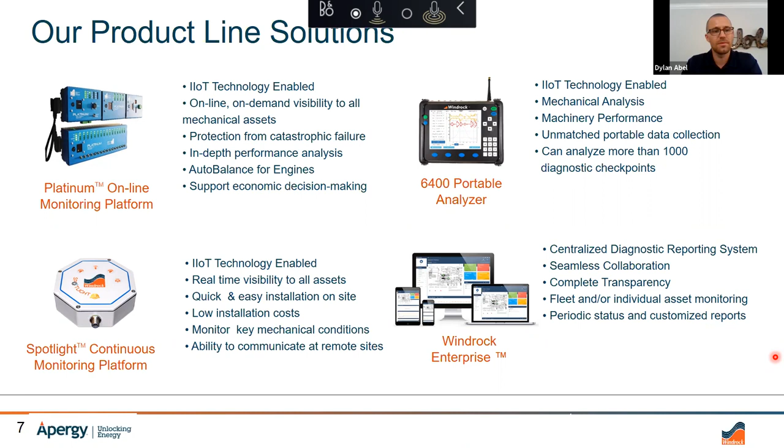Go to the next one there, Mike.

So where our systems are used: we kind of worked with our customers, got an outlook of the market on how we divide up our products with respect to the machines. So there's about 20% of the machines out there that are your critical assets. These are crucial to the process. They require a shutdown at the sign of an issue, because you don't want to have a catastrophic failure. And this is where Platinum comes into play with the real-time data updating almost every second. It's got built-in relays, so you can send a signal to, say, your PLC to shut down the machine before there's a catastrophic failure.

And you've got 75% of the assets out there that are essential. So this is where you install Spotlight across your fleet. It'll raise its hand and let you know where you need to go out with the portable analyzer to take data that day.

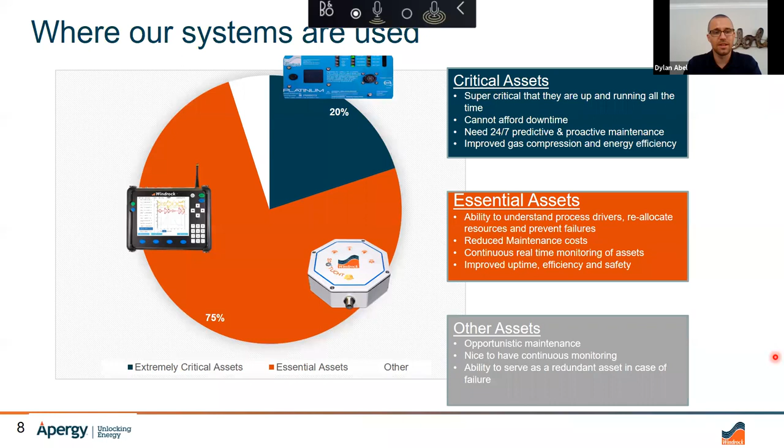Okay, guys. This presentation is going to be in 2 parts. I'm going to talk about the rod load, and Mike will talk about the actual pin load. So if we look at this cutaway view of a compressor, you notice that the piston's in the cylinder to the right there, and the rod is attached to it. So the gas forces inside the cylinder will act on the rod, and then the forces will also go through the rod into the crosshead, and start acting on the pin and bushing there. So the software actually measures 2 points here: the rod load and the pin load. Mike's going to talk about the compressor pin part later. I'll talk about just basically the rod loading right now.

So you can ask yourself a question: what's the weakest link in the crosshead? If we go back to that last slide real quick, Mike, if you look at all these components in this compressor here, what is the weakest link? If operations puts too much gas pressure in the cylinder, will the piston break, or will the rod break? Or if it overloads that cylinder, will it wear out the bushing in the crosshead? Or will it break at the actual threads where we screw it into the crosshead? So every manufacturer has a different location for its weakest link. And it's really important that you know your equipment, so you can set up the software accurately and tell what's your rod load. We're gonna talk a little bit more about that later.

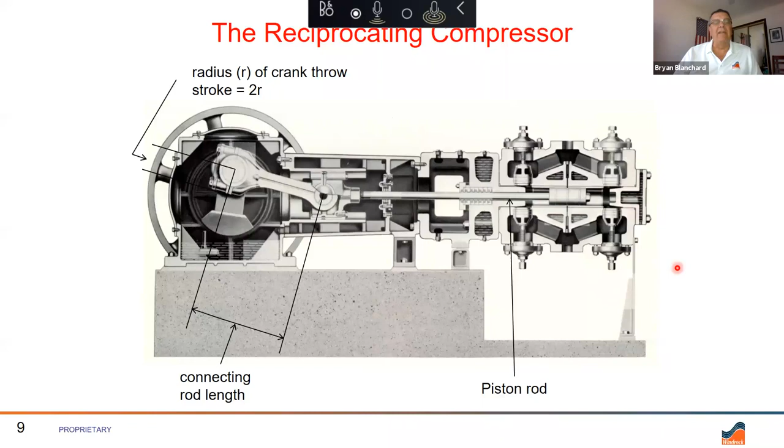The next slide here shows us just a basic pin, a piston and rod. So that's what I'm gonna talk about here. This is called rod load. Basically it's the gas force on each side of the piston face. So when the piston's moving forward, the pressure on the head end is greater than the crank end, so it's actually bending the rod. And then when the piston's moving from top dead center to bottom dead center, the pressure is greater on the crank end part of the piston face, so the rod is actually stretching. So within one revolution, the rod bends and stretches. So this is rod load. It's kind of like a coat hanger effect. It can bend and stretch for a long time, just like a coat hanger.

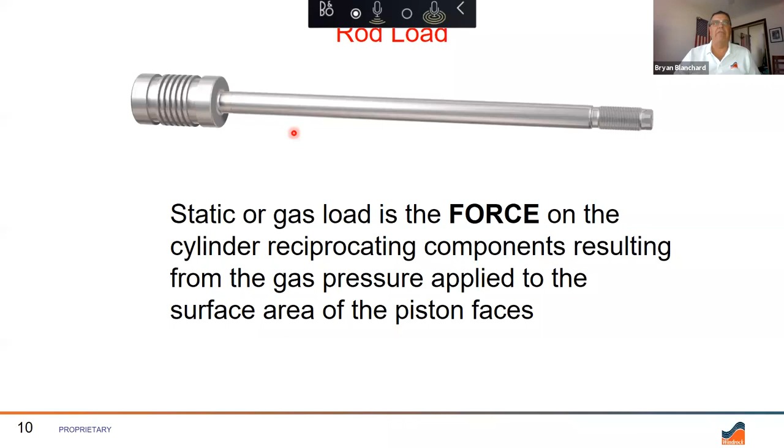You can bend a coat hanger and you'll never break it. But if you bend it too much, it'll actually snap, right? So manufacturers know how much this rod can bend and stretch, and they give us a limit. So the software will calculate the rod load, the actual rod load, and compare it to the limit of the manufacturer. Okay, so the next slide shows pretty much the formula for gas force.

And it's a real simple formula. You can do this on a calculator, actually. So the gas force on a crank end is actually equal to the pressure on the crank end times the area of the crank end. And that's it. So if you look at the formula at the top, gas force CE, so the top there,

Mike, for me? There you go.

So to figure out the force on the crank end, all we have to do is take the crank end pressure, PCE, times the area of the crank end. So the pressure is real easy to get, and if we know the bore and the rod diameter, we can calculate the area very easily also with these formulas right here. So that's the force on the crank end. And then the bottom one here is gas force head end.

So once we calculate the force on the crank end, then we have to calculate the force on the head end. So the software is going to do two formulas here. It's going to do the gas force on the crank end, then it's going to calculate the gas force on the head end. Once it does these two, it has to subtract the two, and that's your actual rod load. And that's gas force only. This has nothing to do with the weights or the inertial forces. Okay, we'll go to the next slide.

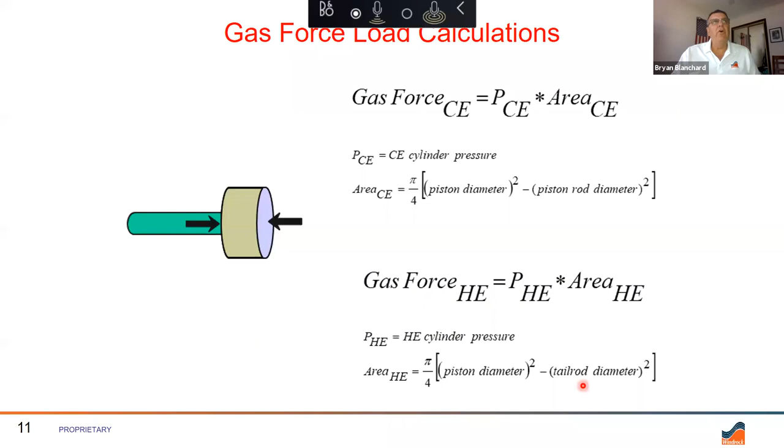Here we're talking about the compression calculation. So to figure out compression calculation, we're going to take the head end pressure, okay, and we're going to actually take the area of the head times the discharge pressure. So when the piston's moving from bottom to top dead center, the pressure is greater on the head end. So that's why we're going to use the head end discharge pressure. And then you're bending the rod. You can see the rod here is kind of bending on us, right?

But we do have a little help from the crank end, right? So we have to get the force on the crank end. So that's when we're going to take the suction pressure times the area of the crank end. So once we figure out the force on the head end of the piston and on the crank end of the piston, we're going to subtract the two, and that's going to be our compression calculation. And this is going to be expressed in pounds force, because basically it is force, right? And the higher the pressure, the more force we have. So that's the calculation for compression.

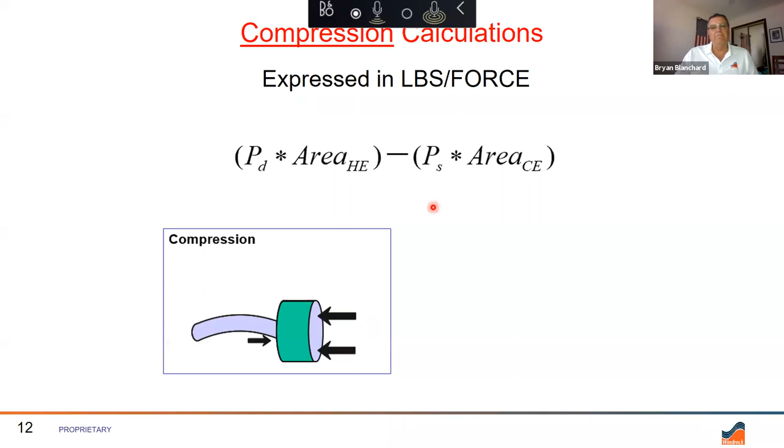Next slide shows us the calculation for tension. So tension calculation, like I said, this is when the piston's moving from top dead center to bottom dead center. So now when the crosshead is pulling the rod back, we have more force on the crank end, and we have a little bit of force on the head because the crank end now is in compression and discharging. We have more force on the crank end, and it's actually stretching the rod. So you can see here that the rod is being stretched in the picture.

So the calculation for tension is basically the same thing, but now we're going to take the suction pressure on the head end times the area of the head end, and then we're going to take the discharge pressure on the crank end times the area of the crank end. And we're going to subtract the two, and that's going to be our tension calculation. And this is also expressed in pounds force. And it's that simple. So this has nothing to do with weights. This is all the pressure inside the cylinder on each side of the piston face.

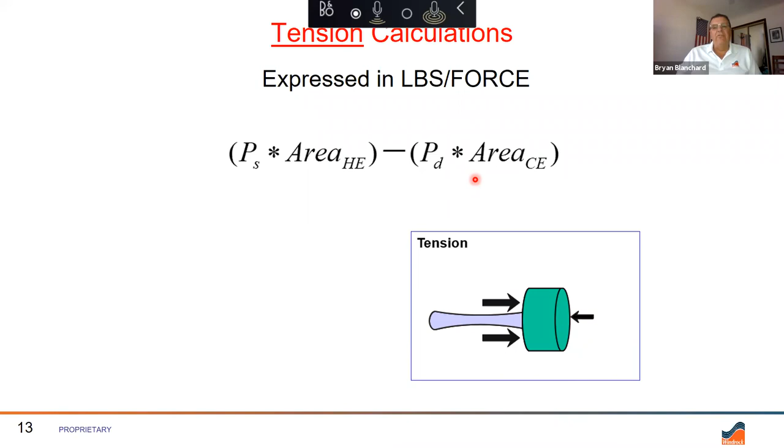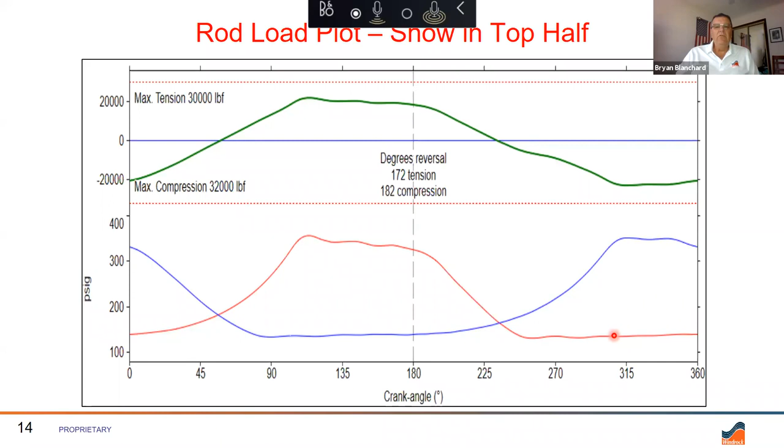So if we go to the next slide here, if you don't like to look at it that way, you can look at that gas force in the middle of the plot, right? So all we have to do is right-click on the plot, go to options, and right here to the right, you're gonna see rod load plots, and we'll grab overlay on main.

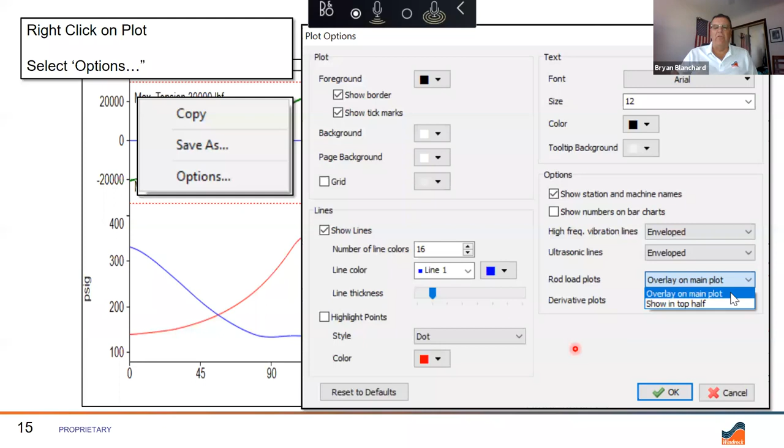So if you do that, if you go to options and grab overlay on main, we'll go to the next slide. We can see now that the gas load here is overlaid on top of our head end and crank end. So some people like to look at it this way. It's a little easier to look at, and we can compare the data.

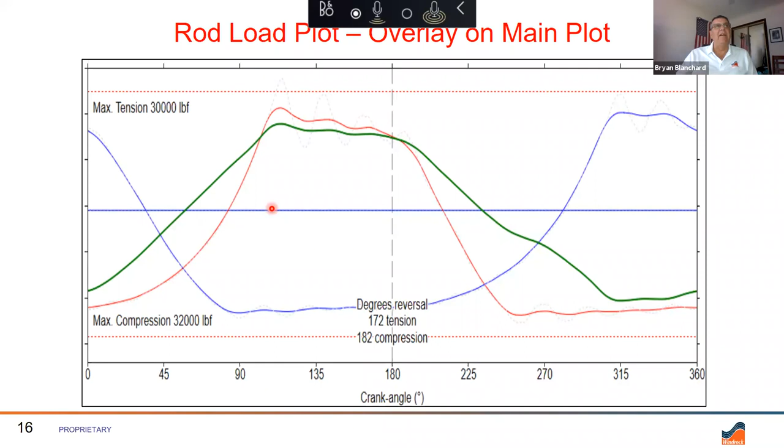Okay, so basically what the software does here, it calculates the gas force at every crank angle degree. So if you remember those formulas we were just looking at, the next slide here is a zoomed-in view of what the software is actually looking at. So the software looks at it per dot. We look at it in a line trace.

So if you go to degree number 1, right, degree number 1 shows us the suction pressure, and that's your gas rod load right after degree number 1. So if you look at your gas pressure for the crank end here, it's at suction, it's around what, 140. Okay, so that's our suction pressure on one side, the piston face. And if you go to the head end discharge at degree number 1, yep, it's about 315.

So the software is going to use the 315 and the 140 for the pressures, and it's going to calculate the rod load. And then it's going to come up with a rod load at degree number 1, Mike. The rod load here at degree number 1 is about 45,000 pounds. So if you look all the way to the left, you're going to see your rod load plot there. So it's somewhere between 25 and 50, probably around 40, 45,000 pounds force.

And then as the piston moves another degree, now the software is going to sample the pressure data at degree number 2. And now it's going to use the pressure data at degree number 2 to calculate the rod load, the gas force there. And it's going to do the same thing for degree number 3. So the software is actually going to calculate 360 rod load points for us in one revolution.

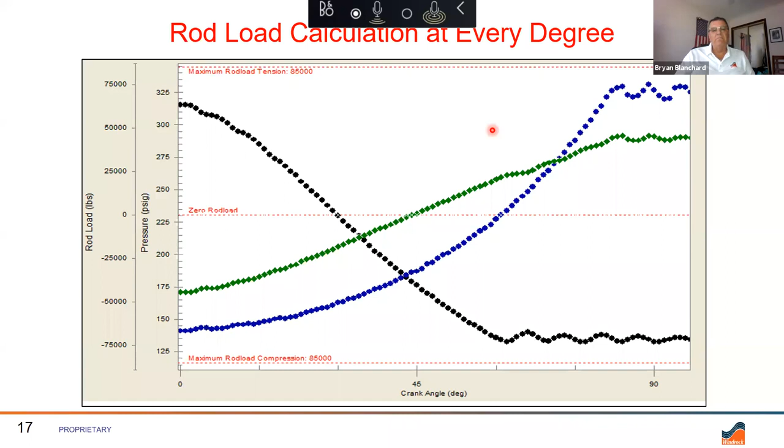So our next plot here is the actual software looking at the plot for us. And you notice cylinder number 1 here, the absolute load in pounds force is 20,413. So the compression on this particular cylinder is 20,413. And then if you look at the tension, it's 18,313. And the next column is telling us percent load.

So it's telling us that that rod is at 63.8% in compression. It's going to divide the actual 20,000 by the 32,000 where Mike's pointing right now. So this software calculated 20,400, divided it by the 32,000, and said that that rod load is only 63% load.

So the objective here is we have to make sure that in the software, we have the correct manufacturer's limits here. So in this particular unit, we did go to the manufacturer. They did tell us it was 32 for compression and 30,000 for tension. So sometimes this is a hard number to find. Sometimes it's on the actual tag of the compressor. Sometimes you have to look in the book. Sometimes you have to make a phone call. But we need to get this information correct.

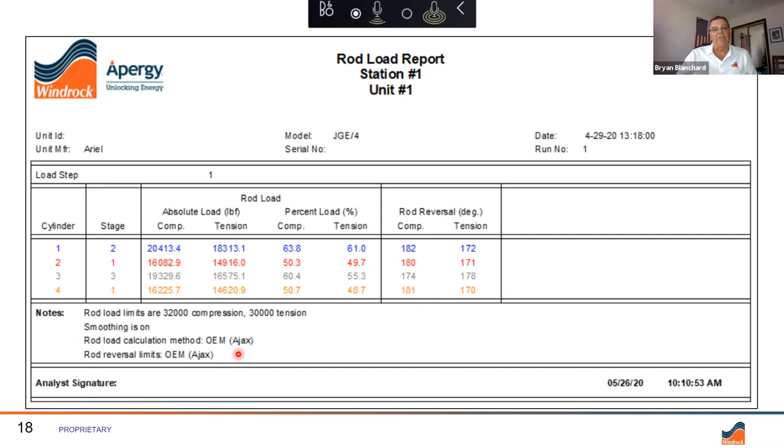And if you notice down here in the notes also, this is from an Ajax compressor, okay? So Ajax rates their rods a certain way. And Dresser rates their rods differently, and Ariel rates their rods differently. So everybody has a different way of rating their rod. So some guys, they rate the rod itself. Some guys say that the weakest link in the throw is the bushing. So you have to make sure that you know your equipment and you check the right manufacturer and you get the right rod load limits.

Okay, so the software helps us here. So if you go to setup software options, and then in the software options window, you go down here to the rod load and reversal. And you're going to see here at the top, what we're talking about here is rod load calculation method. So later on, Mike's going to talk about the actual pin load. Here, we're just talking about rod load. Remember, there's two different components here we're going to look at. The software is going to look at the rod load and then the pin load.

So at the top portion of this window here, rod load calculation method, I'm checking OEM. And then I'm going to hit my drop down window there, and I'm going to grab the manufacturer of my compressor, whether it be Ajax, Ariel. So there's a list here that we can look at. And then when you check Ajax here, you notice that the rod load calculations detail tells us Ajax uses the suction and discharge toe pressures to calculate their gas force on their rod. Says that it does not use the inertial forces.

So in the software here, there's 20,413 down here on our rod load report. Cylinder number 1, stage number 2 is 20,413. That's because the software is going to look at the suction and discharge toe pressures, and it's not going to use the weights. It's just using the toe pressures to calculate that 20,413. And the same thing with the tension, the 18,313, it's using the toe pressures.

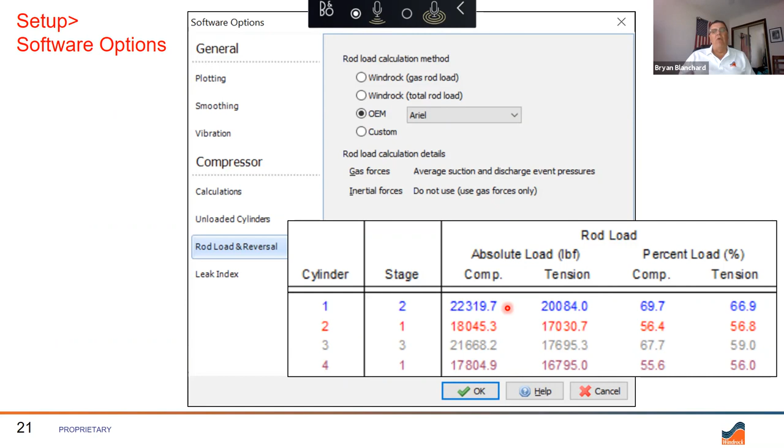The next slide here is just an example of a deactivated head end. If you notice, the blue trace here is a flat line, that's our head end pressure and it's deactivated. So we have a suction valve deactivated and it's just staying at suction pressure. But we do have a crank end pressure and it is compressing on the crank end. And we do get a rod load. So we want to make sure that this rod load goes into compression and tension. And Mike's going to talk a little bit more about that.

But what I'm trying to point out here is I've seen some analysts say, well, my head end's deactivated, it's not pumping gas, I'm not going to take pressure on it. But no matter what, you want to take pressure on the head end and crank end always. This way the software can calculate rod load and pin load for you. So whether it's deactivated or loaded, you always want to take pressures on both ends of your cylinder. So that's a little bit about rod loading. I think Mike's going to take over here and talk about the pin load.

Hey, Bryan, you want to answer these couple of questions real quick that came in while you were speaking? Yeah, sure. So the first one is from Ralph. When it calculates the rod load, does it use absolutes or does it matter? It uses absolute, yeah.

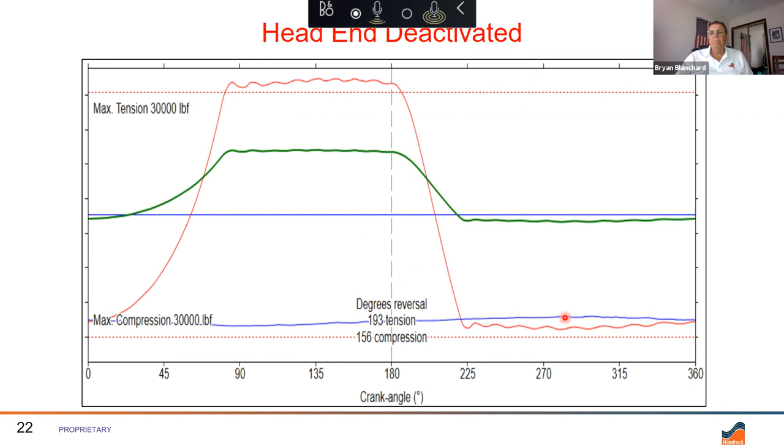The next one here from looks like Javad Esmil. If the OEM doesn't specify the rod load, how do you specify it? Yeah, that's a hard one. I mean, we do have our Windrock geometry table. You can look up your compressor in there. And if you want to trust that data, what I do is I try to find, like I said, Ingersoll Rand HHE compressor in our Windrock geometry table. You might have about 10 to 15 different HHE compressors. And if you see your rod diameter in there, I'll look at several different ones and I'll try to maybe get an average of those.

Mike, you got any other way of trying to figure out rod load if you don't have it? Yeah, at least Ariel makes it easy on us. If you've got your sizing program, they give you all that information. And it's on the tag too. Yeah, you can find that on the tag for Ariel. Some of the Dresser and Worthington, some of those others, especially the older ones, are real hard to find that information. And another thing, you have to make sure that you're getting the information for the rods you've got in there. We have some aftermarket rods and we have the OEM rods, and their tension might be different. That's a good point. The material is different. That's right.

But yeah, the best way to do it is, I believe we have that on our website. And I think it's also in the help section of the MD software. And it's called the Windrock Geometry Program. And if you can find some of your equipment in there, you can match it up. Yes.

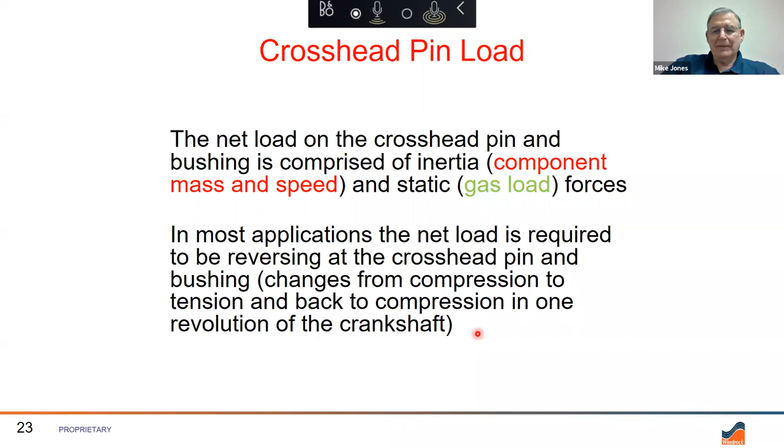And this is kind of another one of those plots where we can actually see the inertia load here. Now this is the pounds of force that's being generated by the instantaneous acceleration of the masses of the crosshead, which is all the weights that we have entered into the software. And this works exactly the same way as what Brian was talking about. We're taking this instantaneous acceleration per degree and calculating it at 1 degree increments. Okay, then we have the gas load down here, which Brian talked about, and it's showing its normal track.

Okay, now the red marker, that is red, isn't it, Brian? The total is red. I'm colorblind. Yeah, that's the total there, Mr. Mike.

Anyway, so we can see the total here is kind of an algebraic sum difference between these two here. In the slower speed units, the inertia load dampens the gas load, and in the high speed units it's just the opposite. The gas load actually dampens the inertia load. So when we're getting up to 1200, 1400 RPM, this inertia load can go quite high.

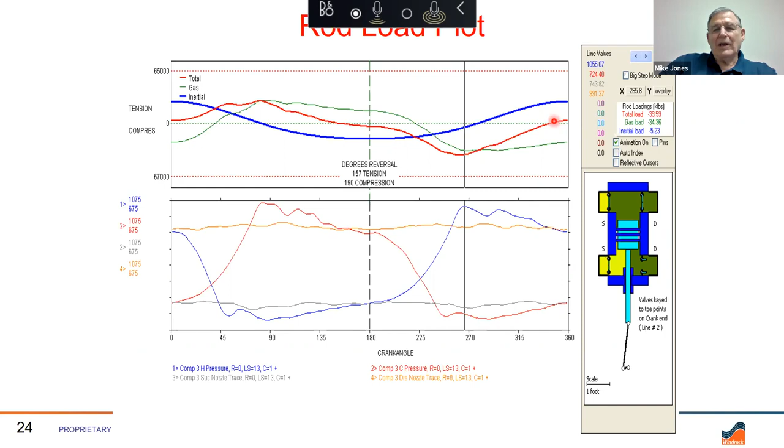Okay, and what we're talking about is the inertia load is the force in the cylinder that results from the change in velocity. As the piston takes off, we create quite a bit of inertia because we have quite a bit of acceleration going on then. Then when the piston starts to slow down, we have just the opposite effect. We have deceleration, which also creates a force in there. And another thing to remember, if we had both cylinder ends unloaded, the inertia forces are always reversing on every revolution of the crankshaft. So they're always going to go positive and negative, no matter what.

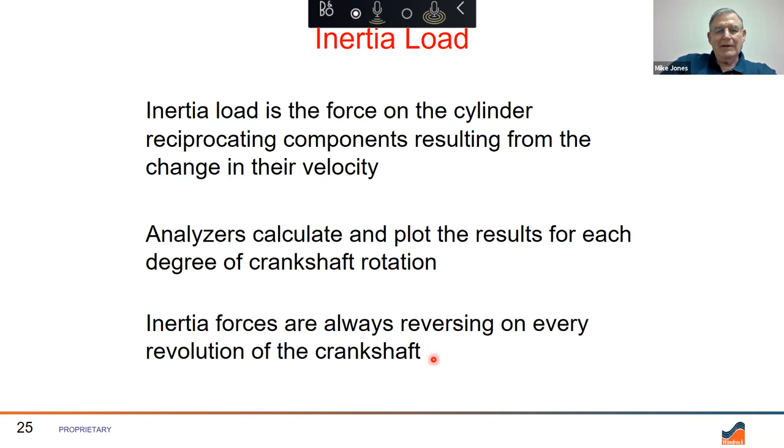And then the reciprocating inertia forces are caused by these masses here. Okay, so we have the piston mass, we have the rod mass, we have the crosshead mass that also includes jam nut, balance weights, whatever we happen to have attached to that crosshead assembly.

Okay, now we have a connecting rod here, but we don't include that in any of our inertia calculations because it's a pretty complicated thing, which part of it is rotational, which part of it is reciprocating, and it's different for every manufacturer. No manufacturer includes the connecting rod weight in any of their inertia calculations. Okay, so as these go back and forth, that inertia from that actual weight slings back and forth, and it causes a force on the same components that you're causing force on with the gas load.

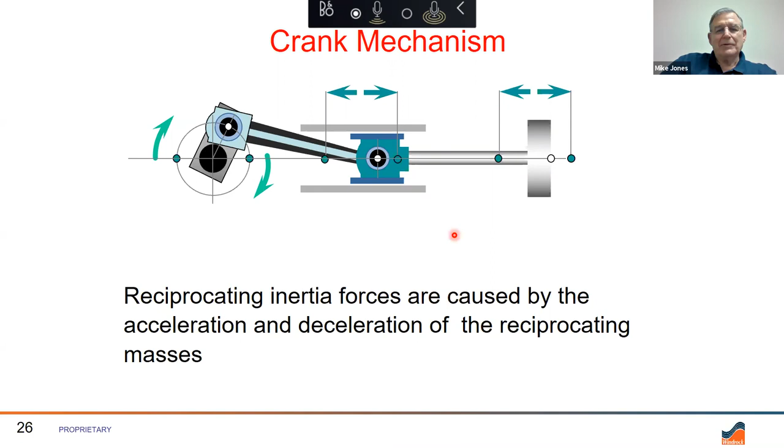Okay, here's a little chart where we can actually see the displacement of the piston as it goes from top dead center to bottom dead center, back to top dead center. And we can see it kind of flattens out a little bit on both ends and also in the middle. That's because we have several degrees of crankshaft rotation at both top dead center and bottom dead center where we don't have any piston motion at all. So that slows it down right in that area.

Okay, now the velocity here, we can see the piston as we start out at top dead center, we're going to be increasing in speed because of the ratio between the connecting rod and the crankshaft webbing. So we're going to speed up to where, just before 90 degrees, we have maximum piston velocity. As we go all the way back down to bottom dead center, then we have no velocity at all at 0 and 180. Then as we start going the other direction, just past 270 degrees, we have another point of maximum piston velocity. When we hit our highest piston velocity though, we really don't have any inertia going on there at all.

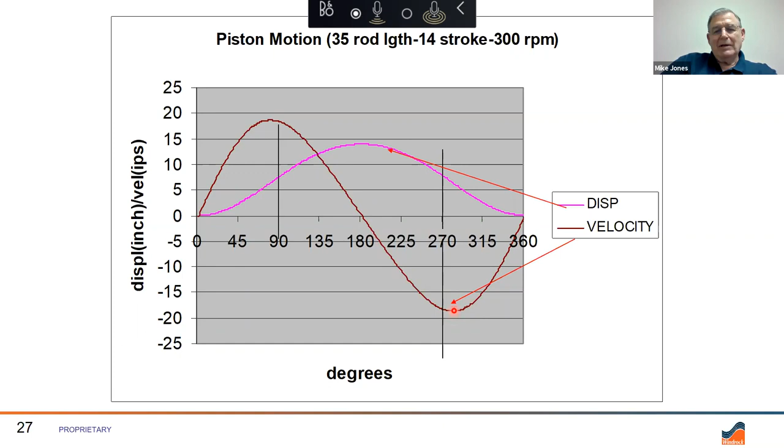Okay, and we see here that same thing where we have our tension load and our compression load by inertia. And it shows here with no gas load on it at all, we have 157 degrees of reversal in tension. We have 197 degrees of reversal in compression.

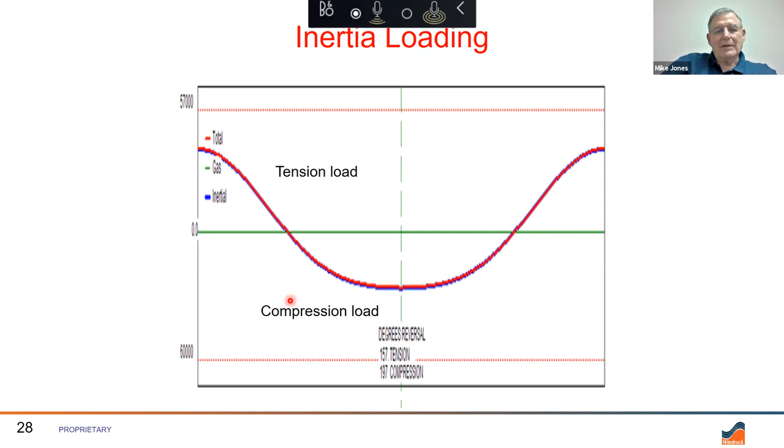So it's always reversing. Okay, your net load, or your total load, is just simply the sum of the inertia and the gas forces. It's calculated for each degree of crankshaft rotation, and the reversal occurs after the net rod load passes through 0 pounds and has met the manufacturer's requirements for reversal.

And just like rod load, like Brian was talking about, most manufacturers have specific criteria of how many pounds of force you have to have above 0, how many degrees of force you have to have above or below 0 to actually qualify as a reversal. So that's another thing that you need to find out from your manufacturer.

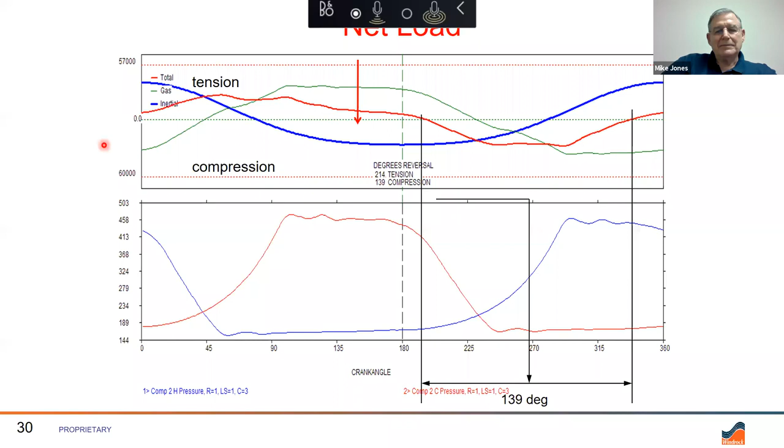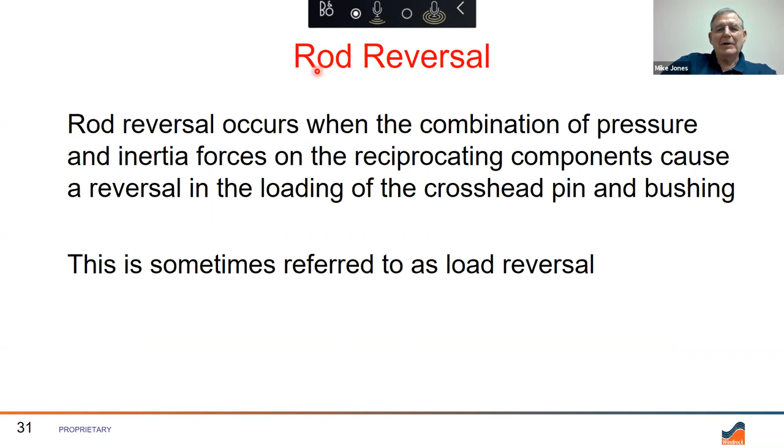Okay, your rod reversal occurs when the combined pressure and inertia forces actually reverse that pin and bushing, and it's also called load reversal. Now we hear that called rod reversal. Say we got rod load, we got rod reversal. Well, that's just kind of a generic term that we've got going on for that, but actually what we're looking at is the pin reversal. That's what we're wanting to go with.

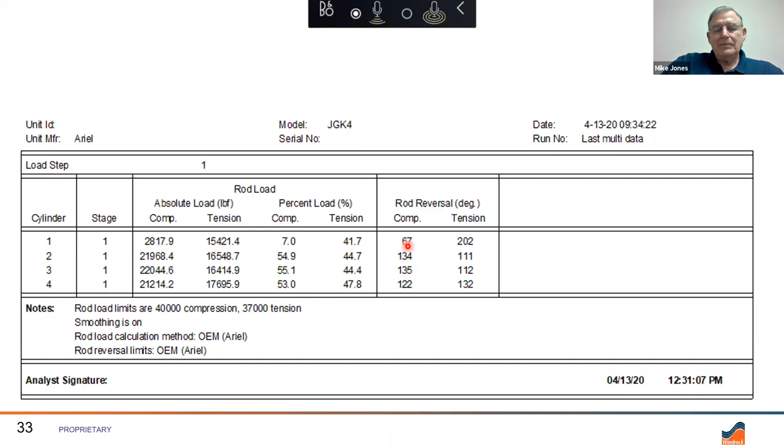As we can see by this report here, we're showing our reversals. This is showing the rod reversal in degrees in compression and tension. Like cylinder number 1, we have 67 degrees of compression. We have 202 degrees of reversal in tension. And then it shows that the rod load limits are 40,000 pounds compression, 37,000 tension. And the rod load calculation method is OEM Ariel.

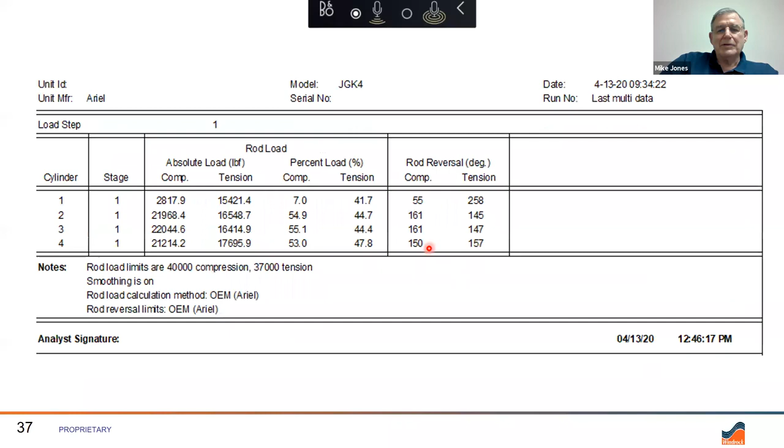So as Brian was telling us, we need to know what the manufacturer recommends for your equipment. That's some data that you're going to have to look up or try to locate somewhere. And like I said, if you're running Ariels, their sizing software has all that information in it for you. And some of the other ones, it might be a little difficult getting that information.

But if you've got the old books on it, I've spent hours delving through the libraries at different locations to find the actual paperwork and the books that they got with the particular piece of equipment when it was set. Some of it's 40, 50 years old, but that data was still there. So I had to dig through their libraries and find that information in order to set it up in the software correctly.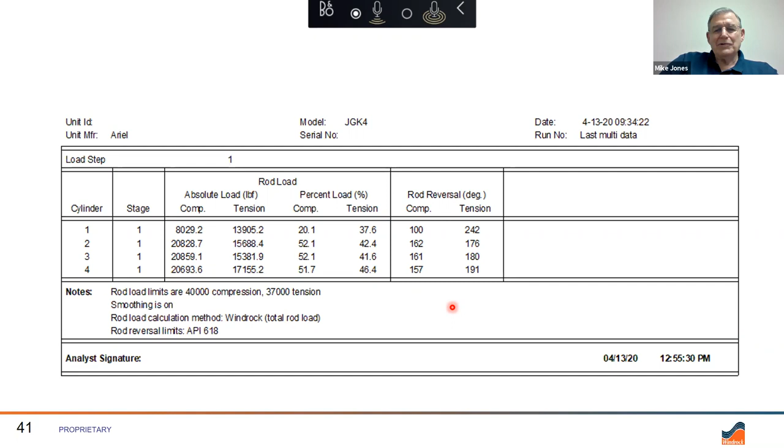Yeah, there are a few other questions here. I think Bryan's been answering some in the background.

Oh, thanks, Bryan. Yeah, I was wanting to know, Mike, when you're trying to figure out inertia load, should you use the nut, the piston rod nut? Should you use the balancing weight? Should you use the pin, your crosshead pin? What components in the throw should you use to try to figure your inertia? Yes, all of the above, everything except for the connecting rod.

Okay, then they have certain criteria and rules on that pin too. Some of the old Worthington compressors had what they call a captured pin, where the end of your connecting rod had a clamp bolt on it that clamped down on the pin and would not allow it to move inside the connecting rod, and then the bushings were in the crosshead.

Then we have some where the only bushing is in the connecting rod, and the pin is actually captured in the crosshead assembly, so it's nailed down in there. And then you have some where it's free floating, like the Ariel, where it has bushings in both the crosshead assembly and the connecting rod.

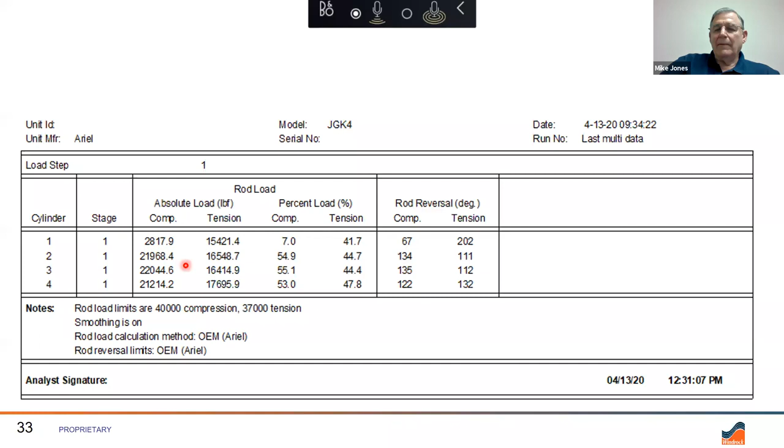Okay, here's one that says: I understand that gas forces affect rod load, but do I need the weights to calculate pin bushing load? Yeah, actually you do. You need those weights in there to calculate your pin load. And like I said, sometimes those weights are very hard to find.

So if you don't have your weights in there and you get a rod load with reversal on your calculations, if your rod load goes a little bit above or below your compression and tension limits, then you have to kind of figure in your head, well, the inertia weight's going to subtract a little bit from that, and it's probably going to alter the reversals as well. But if you don't have the weights, you just have to get along without them. We've been doing that for years when we couldn't get them.

Yeah, if I don't have weights and I'm pretty close to reversal, I'll try to throw some weights in there. I'll make some up that I think might be pretty close, just to see how it affects it. Sometimes it helps it, sometimes it hurts it. Yeah, I've gone back through all my databases and found compressors that were similar to try to calculate the weights.

Ariels, total weight, crosshead and everything, you're looking at 230 pounds up to 300 pounds, something like that. But some of those old big HHEs, you may be looking at 1,500 pounds of slinging mass. So you can probably guess pretty close within a couple hundred pounds on one of those big ones, which will help you out.

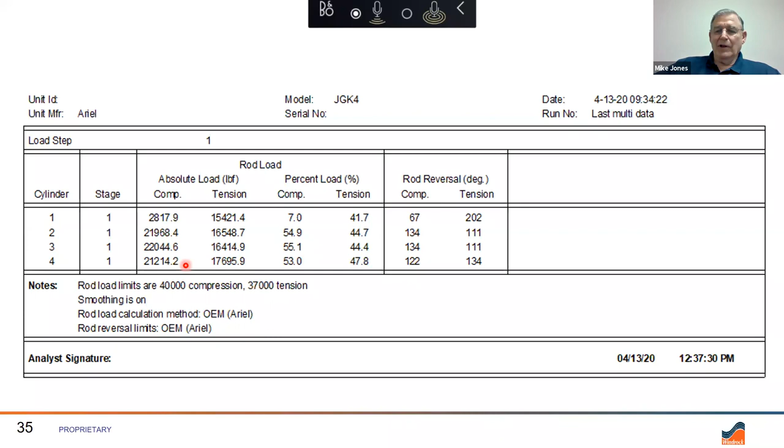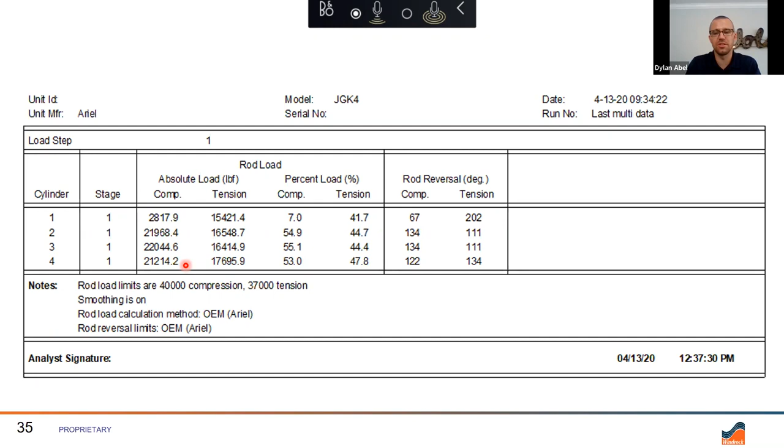Okay. Got another one here, Mike. If you go back to the slide where you can choose your OEM rod load calculation and reversal. So we show two options, Windrock calculations. What's the difference between those? Well, one of them is you're not using the total rod load, which would mean that we're not actually using the inertia in there. So we can choose to use the gas load only, or we can choose to use the total rod load, which would include your inertia weights.

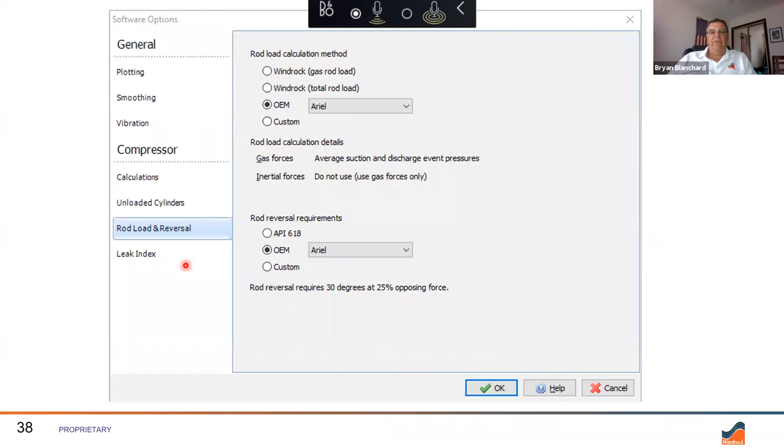So what's the best one to use if our OEM is not listed in that list? What would be the best one to use? Well, if you don't have all the weights, then it really wouldn't make any difference which one you push. If I didn't have the weights and didn't have any intention of putting any guesstimated weights in there, I would use just the Windrock gas load only. Okay. Does that make sense, Bryan?

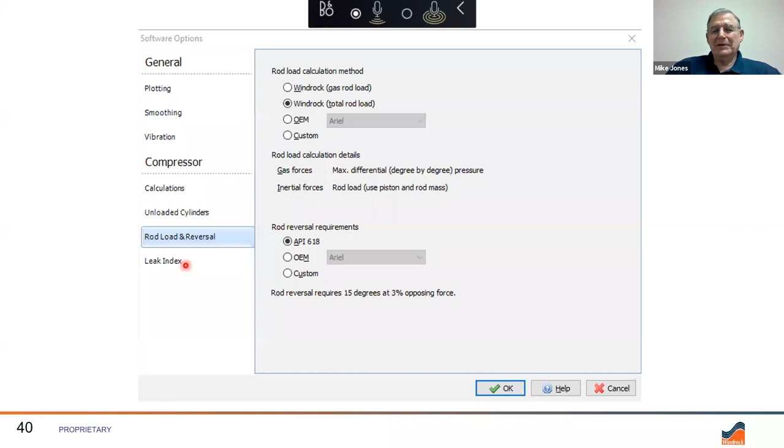Yeah, and we had another one too. The question was, do different OEMs have different requirements for degrees of reversal? Oh yes, and some of them won't even make a guess. They suggest this or they suggest that. They won't actually let you pin them down on an actual calculation requirement. So, yeah, all the different OEMs have different reversal requirements as well.

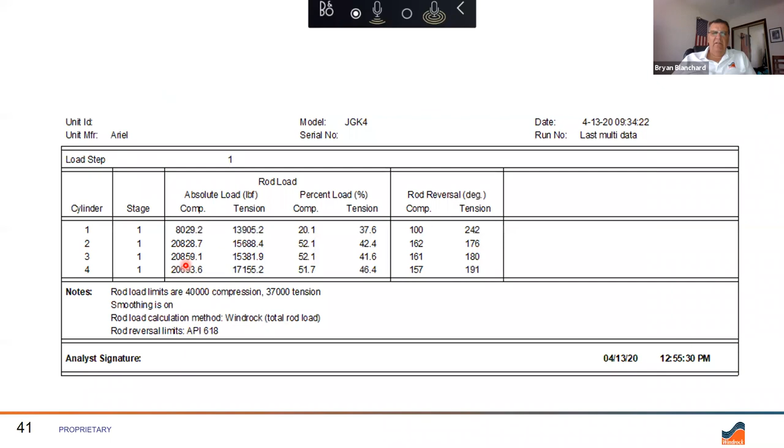Yeah, if you go back to that slide where you have your reversal points on the actual graph. Yeah, right here. So I guess if you got 112 here and 135, if you add those two up, that doesn't calculate to 360 degrees. Well, there's two different explanations for that. We don't get 360 out of this because we had this amount and this amount that were above the manufacturer's requirements for reversal. And also because of the fact that we don't have much piston motion at top dead center

and bottom dead center. So some of those large compressors, we may have 4 or 5 degrees of crankshaft rotation where there's no piston movement at all. So that actually goes into that too, as well as what the manufacturers recommended. All right, so the software doesn't start counting how many degrees of tension until you satisfy the 15 degrees or 3% differential pressure or whatnot.

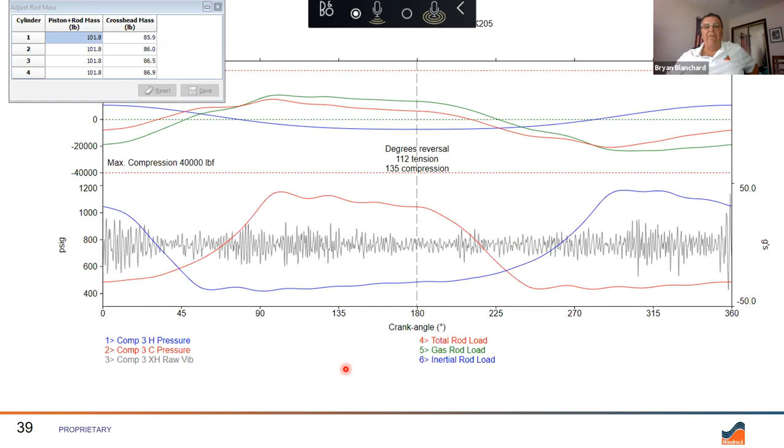And the last one here, I know we're getting kind of close, Dylan. Does the speed affect the rod reversal? Oh, heck yeah. It affects the inertia force. Yeah, it affects the inertia force, and then in turn, the inertia force is going to affect the reversal. Not as much as you would think it would, but the speed will make a difference.

As a matter of fact, a lot of times if we try to run some compressors at a low speed, say we have a compressor that's designed for 1200 RPM, and we try to run it at 600 RPM, you may go into a non-reversal in certain situations because you're not generating enough inertia to offset the gas loads. Or you're not generating enough inertia to actually reverse the pin if it's close. So, that's just something you have to go over with your manufacturer, do some testing and see what it is.